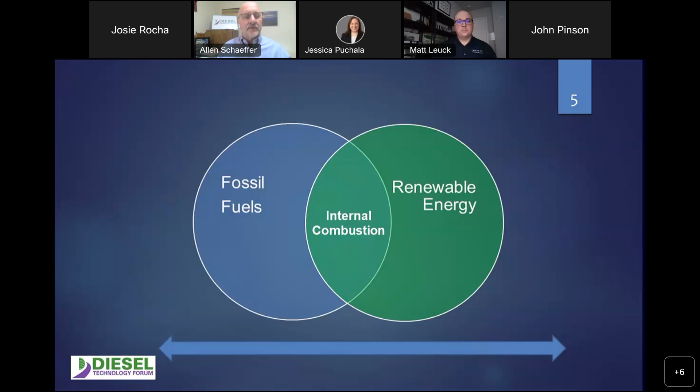I want to begin by framing the moment. We are in a world of transition in terms of energy. We are reliant heavily on fossil fuel energy, but also trying to make a move towards using more renewable energy, both in the kind of energy that powers our homes and powers our vehicles, machines, and equipment. The internal combustion engine is seated squarely in between these two worlds, and that is the subject of our discussion today: the how, why, and where diesel fits—internal combustion engines, including diesel and other types—how they fit in this future going forward.

There are, as you all know, many global policies and pledges in place now that are impacting future fuels and technology. This slide lists a few of the major ones, including the Paris Climate Accord and some more specific commitments made by the US government.

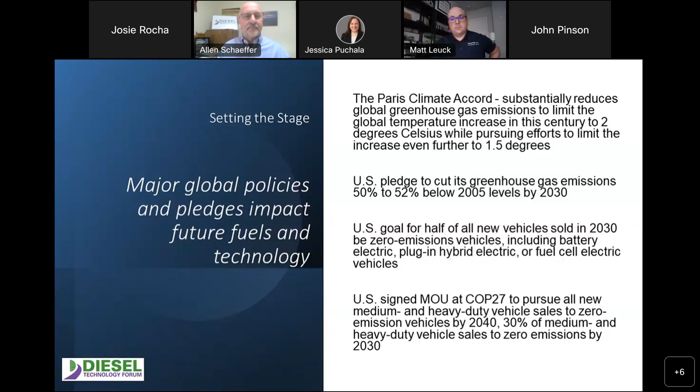These have led to a major emphasis on electrification and technologies that could replace internal combustion engines in some sectors. But there are many uncertainties here for this kind of transition, including geopolitical concerns and others listed here. There are also many questions about whether or not these kinds of transitions can take place in the time frames that have been identified. And then there is a question about whether or not alternatives to internal combustion engines truly are zero emissions technologies.

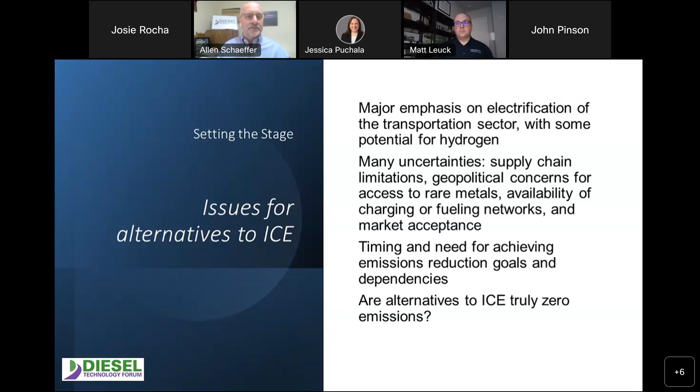And that is the subject for us today. The future for internal combustion engines is one that's going to be determined by a whole range of developments. One of those is that we've seen some government activity proposing or adopting bans on future internal combustion engines used in passenger vehicles and some commercial vehicles in some countries and even in some US states. On the other hand, there is a fairly strong prediction that the global internal combustion engine market is going to grow throughout the rest of this decade with a fairly aggressive growth rate, owing to the nature and importance of the internal combustion engine in powering our global economy today.

So we want to know how, where, and why internal combustion engines and fuels will contribute to helping achieve some of those goals outlined on the initial slide. And that's the focus of our discussion today.

Our session will be broken down into three pieces. We're going to hear a keynote presentation in just a moment. Then we will get into a discussion about the markets, technology, and fuels issues around internal combustion engines. And then we'll finish up with a discussion about policies and address these and other questions related to that.

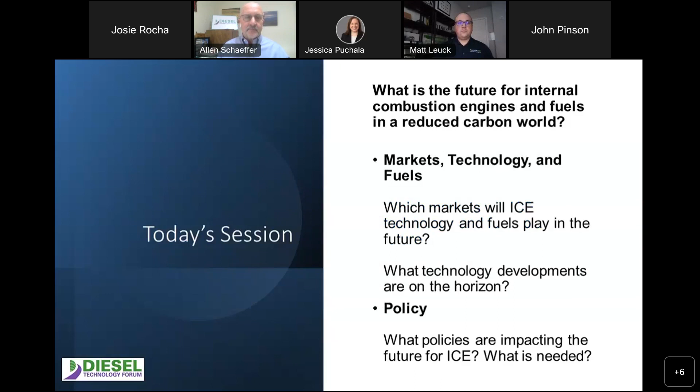I want to thank all of our participants today, and I will be introducing them as they begin their speaking engagements. We have the great benefit of leaders in technology and in consultancies, both on the energy side and the engineering side. I'm really excited to hear the different perspectives you're going to get in the next few minutes. So without further ado, let me introduce our keynote speaker—and for many of you, Dr. Kelly Senecal will need no introduction.

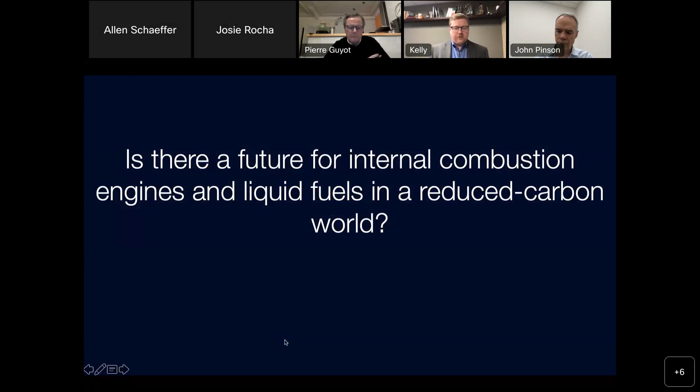So again, asking the question: is there a future for internal combustion engines and liquid fuels in a reduced carbon world? Many people might look at this and say, doesn't look like it. I say yes, very emphatically I say yes, and you'll see why in a moment, and you'll hear why from all of us today in the panel session.

My thoughts on this topic: I believe we're making a big mistake in the transportation sector, including passenger cars, with the singular push - or what appears to be a singular push by many - toward battery electric vehicles, or BEVs for short. If our goal is to reduce transportation carbon emissions as fast as possible, hybrids and also renewably fueled internal combustion engines must make up a significant portion of the fleet, along with BEVs, for years to come. And I feel that instead of pushing a silver bullet kind of solution, government and industry should educate, promote, and incentivize a diverse set of transportation technologies. Because as we'll see today, the best technology depends on location, application, and also budget.

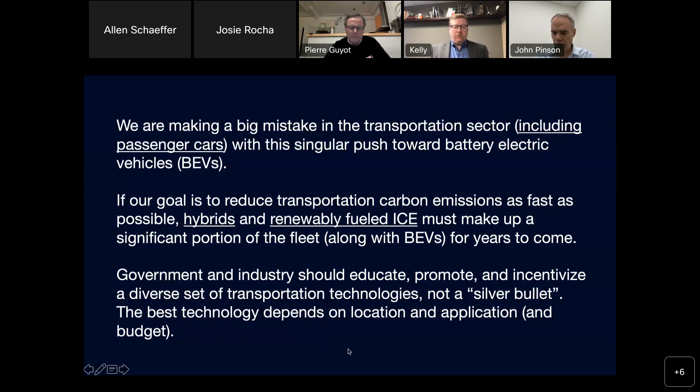My slides here at the beginning will be a little bit passenger car, light duty focused. I did that intentionally because we're going to be hearing a lot about other markets and other applications throughout the panel. Passenger car seems to be the one area where people think that ship has definitely sailed and we're going to be going all electric. So I kind of wanted to make the case that I don't agree with that. So how did we get here? Well, we've already talked about it, right? We have electric vehicle...

This is great technology, vastly improved over the years. The technology itself at a fundamental level is as old as the internal combustion engine, arguably older. But in the last couple decades, maybe a decade or so, we've made a lot of progress. Tesla's made a lot of progress, the other OEMs have made a lot of progress. This is becoming a viable way to get from point A to point B, especially for light duty.

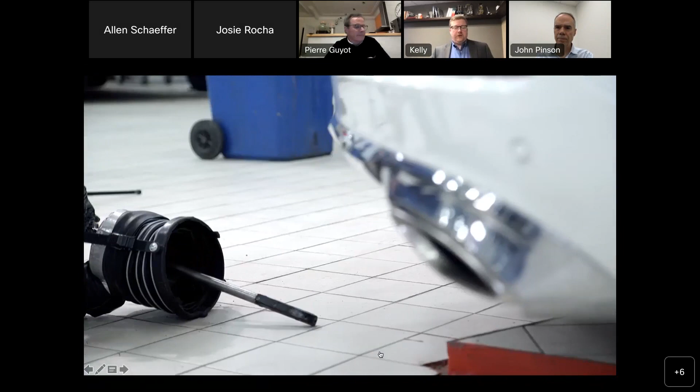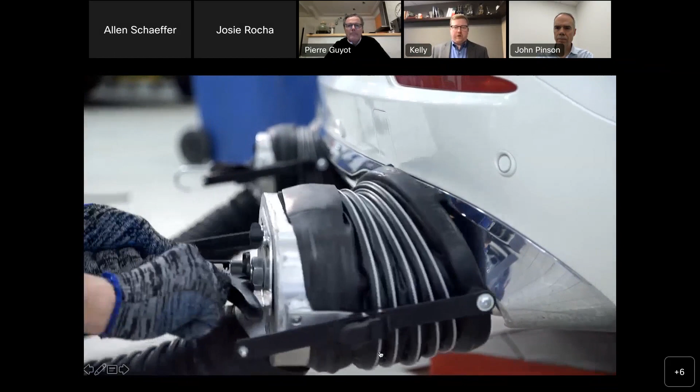The other reason why we're here is, of course, the Dieselgate scandal, which kind of gave the internal combustion engine in general, not just diesels, a bad name. And we're really hyper focused on tailpipe emissions. That makes sense because historically, most transportation vehicles have used internal combustion engines, so the majority of emissions come out of the tailpipe.

So what is the problem now? I would argue we've introduced new vehicle types, BEVs, even fuel cell electric vehicles, without proper methods to account for the environmental impact of driving them. Regulations are typically based on tests measured at the tailpipe, but zero emission vehicles have no tailpipe. What this effectively does is make the CO2 problem someone else's problem.

It's no longer the transportation industry's problem. A zero emission vehicle, in the light duty world at least, is counted as zero CO2, and sometimes it's even counted as more than one zero CO2 vehicle. What that allows people to do is sell these zero emission vehicles and then effectively sell more large, low fuel economy vehicles because of the way we do fleet averaging. So this is kind of a head scratcher.

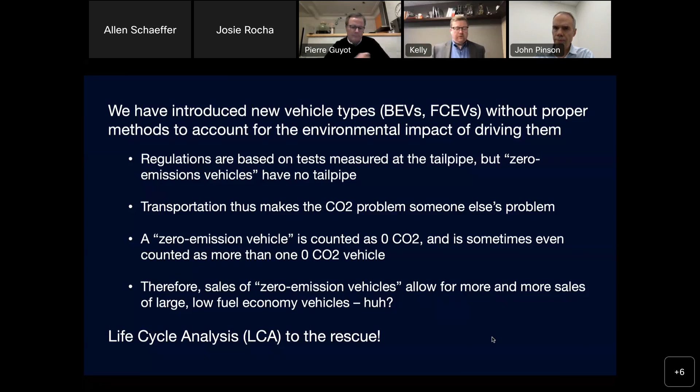Is it really reducing our greenhouse gas emissions at the end of the day? Sometimes yes, sometimes no. But really the way I believe we should be looking at this problem, instead of just looking at the tailpipe alone, is something called life cycle analysis. So what is life cycle analysis? Briefly here.

Typically when we regulate cars, we look at the use phase. Here's a car, imagine it has a tailpipe—what are the emissions coming out of the tailpipe? When you have a vehicle that you need to charge from the grid, we should also be including the electric power generation and distribution, because as we know, when you charge your vehicle, that is creating emissions, just not where you're located.

What about producing the vehicle and the battery? It's very carbon intense to produce these large battery packs. There's also disposal and recycling, and extracting and processing raw materials. So these are all the different phases of life—sometimes called cradle to grave—all the way from extracting the materials needed, the production, using the vehicle, all the way to disposal and recycling. All of these things have an impact on your true driving emissions, and all of these should be considered.

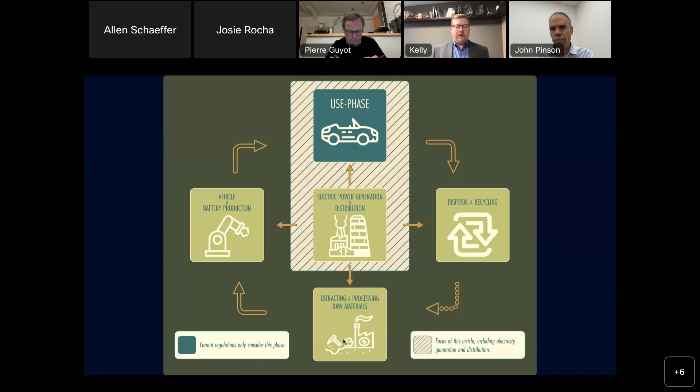So with LCA, it's very promising if done correctly, but it's currently not part of any regulations. It's mainly being used for academic purposes, and also to inform future policy, at least that's the intent. There are a lot of assumptions that go into life cycle analysis, and if you're familiar, you'll know what I'm talking about. A lot of these assumptions are often made to favor battery electric vehicles, whether intentional or not. I think a lot of times it's not intentional.

Often we will compare to traditional internal combustion engine vehicles and not hybrids. We know that adding an electric motor and a battery to an internal combustion engine allows it to be more efficient—that's something we should probably be doing on every vehicle. An average total electricity mix is used to calculate the charging emission rates, and then overly optimistic projections are used for the future electricity mix.

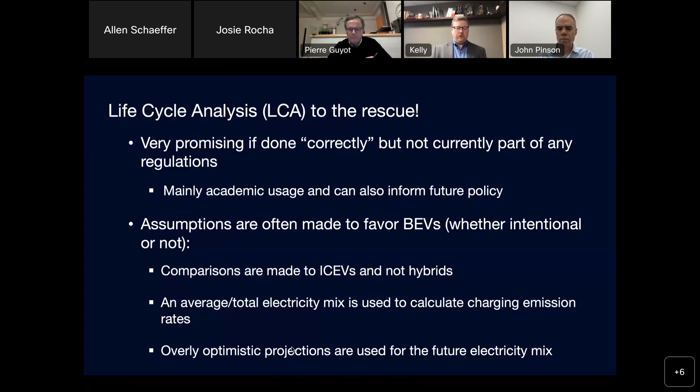Here's an example, a study from the ICCT, which I like to look at because it shows the different issues that are out there for these LCAs. One is they compared an ICEV to a BEV—there is no hybrid. They've looked at hybrids in other studies, but not in this particular one, and we know hybrids would do significantly better than the ICEV. They're also using an average electricity mix for the entire United States, and I'll show how I think that should be done in a moment.

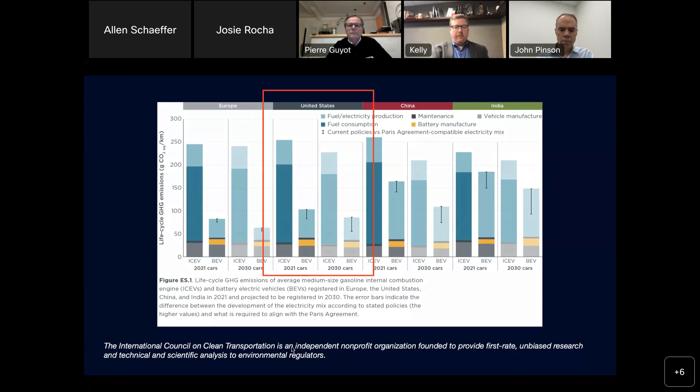And then they are making projections about the future electricity mix, which is true. So how should we compare vehicles using LCA?

I'm not going to go into the details, but I invite you to check out a recent study we put out with one of the SAE journals, called a Data-Driven Greenhouse Gas Emission Rate Analysis for Vehicle Comparisons. This allows us to compare, say, battery electric vehicles versus full hybrid electric vehicles.

If you're not familiar with the lingo, full hybrid means you don't have to charge it from the grid. You're not plugging this in, right? It's just a regular kind of full hybrid. Okay, so how does this look?

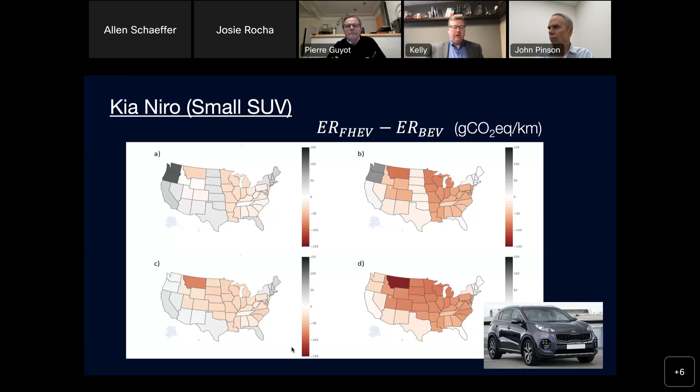But what you see overall, pretty overwhelmingly, is for this vehicle comparison, which is a small SUV, a pretty popular vehicle size in the US, driving the full hybrid actually is better for the climate than driving a battery electric vehicle. Okay, so what are my recommendations?

We'll talk a lot about this throughout the panel session today. But I feel like we should take a balanced approach to transportation, recognizing there is no silver bullet solution. I don't agree with any bans. We shouldn't be banning any particular technology. We should set targets and let the best technology win, understanding that the best technology will likely vary depending on where you are in the world or even where you are in the US.

Use life cycle analysis when comparing technologies. Including only the tailpipe emissions, or even just the use phase where maybe you are including the charging, can still significantly misrepresent a technology's environmental impact.

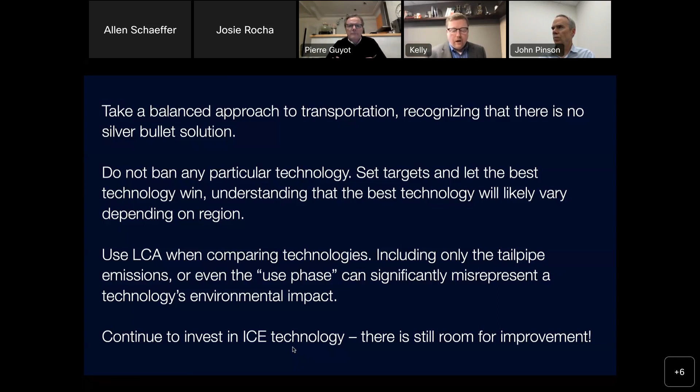I believe we need to continue to invest in internal combustion engine technology. Counter to popular opinion, there is still room for improvement. We should be devoting significant resources to investigating carbon neutral fuels, and you'll hear about this today in the panel.

This allows us not only to make use of the current infrastructure, but what do we do about the existing fleet? Even if we were to turn over all new vehicles to battery electric, there's still a lot of vehicles that are going to be on the road for years and years to come. So we need something to help us decarbonize the existing fleet, and these carbon neutral fuels or low carbon fuels allow us to do that.

Hybrids are actually the fastest way to reduce CO2 emissions from vehicles. We should be treating them that way. I don't have time to go into that table, but I'd be more than happy to answer questions later on that. And then overall, engineering, not politics, should drive future transportation policy.

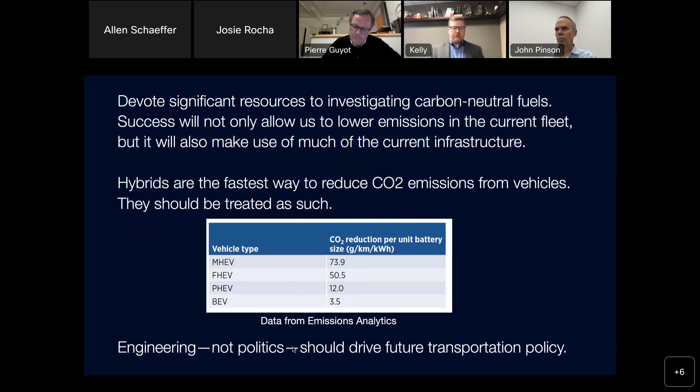So if I'm going to leave you with a couple of items here, one is combustion and decarbonization are not mutually exclusive. We need combustion, we need the internal combustion engine and its fuels. Hopefully we're moving away from fossil fuels as fast as we can, but we need this to help drive decarbonization or defossilization.

And then finally, I'm going to leave you with a question that my son asked a few years ago when he was 13. He had to do a science report, and people think I had a major influence over this, but he would not let me look at this at all. I just happened to snap a photo when he left it on the kitchen counter. His question that he was going to answer in his report is, what is the most climate friendly today, a car with an electric motor or a car with an IC engine? And I think his answer is very appropriate.

It depends. I think we all need to keep that in mind. With that, I'd like to conclude.

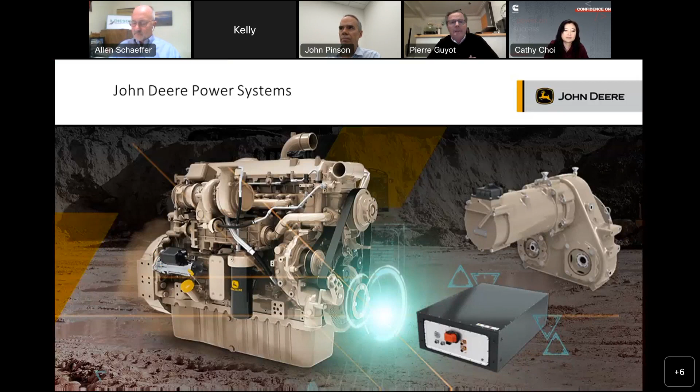So next slide. John Deere Power Systems is a part of John Deere. We are vertically integrated for engine, drivetrain, and battery. We produce 100,000 engines around the world. We produce engines from 2.9 to 18 liters in South America, North America, Europe, and India. Next slide.

And John Deere, as you see, is present globally in every part of the world. We have more than 100 locations. We are from the heart of farming in Illinois, with more than 75,000 employees, a 52 billion dollar company.

One statement I want to open with is we are fully committed to sustainability. John Deere is 185 years old, so we know what sustainability means, we know what resilience means. And we are very committed to helping the world flourish, specifically the people around farming and construction, by committing to reducing our CO2 emissions by 30% by 2030. It's a big challenge for us, but I think both our equipment and our customers can play a significant role in helping the world move into a low carbon environment.

So looking forward to our conversation. I think it's an exciting time we are in, and when an industry is transforming, if people like a large multinational, we have a big role to play to enable that.

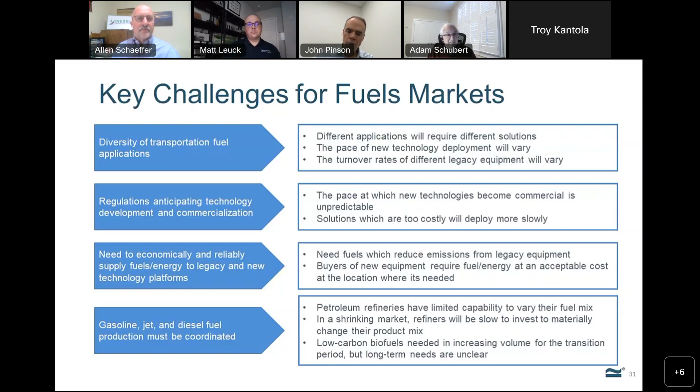Yeah, I'm not hearing you, Allen.

Sorry, thank you, Adam. And I see we have a very healthy Q&A going on in the chat right now. I just want to encourage you to submit your questions for the group, and we'll get to some of those as we move ahead.

Our first topic for discussion is the markets for internal combustion engines and fuels. We've asked our panelists today to consider these and other aspects of that question group. What about the future markets? What are today's markets? What's going to drive folks toward or away from internal combustion engines?

To kick us off with that, I'd like to ask our two OEMs, first Cummins and then Deere, to share some insights about what they see as places where these technologies for internal combustion engines will continue to play a role and where others might come in. So Cathy, let me ask you to kick us off with our first discussion segment.

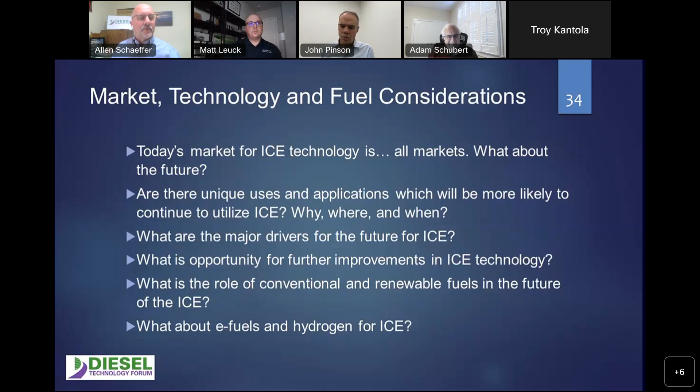Absolutely, thank you. One of the challenges we have is that the markets we serve and the applications in those markets are extremely diverse, and that makes it quite challenging to achieve zero emissions. That challenge is great, but from an engineering and technology standpoint, it's exciting as well. This is a great time to be a technologist.

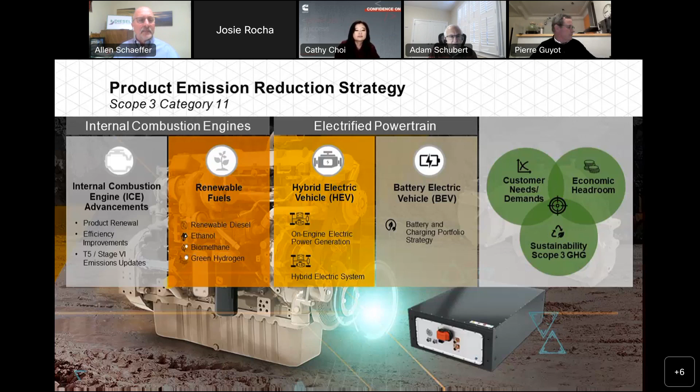I'd like to shift a bit towards some of the technologies coming online to help achieve further reduction in carbon emissions, both on the internal combustion side and others. Troy, I know Tenneco is a leader in many of these segments. Maybe share with us what kind of technologies you're working on that might help extend the future of the internal combustion engine, making it more efficient and lower in emissions.

Yeah, I can speak to that. Tenneco has literally hundreds of products and tens of thousands of research hours dedicated to reducing CO2 through efficiencies and lowering friction. On the advanced end, we have research ongoing with bipolar plates, coatings, types of steels and forms — technologies we're really comfortable with. We also have piston coatings that help insulate the combustion chamber to keep energy in the working fluid, resulting in useful torque to the engine.

We also have passive pre-chamber work that will distribute, normalize, and stabilize combustion processes, along with a host of products that reduce friction, whether it be seals, coatings in the ring pack, or coatings on bearings. Within our clean air group, we also have a technology that helps control criteria emissions in a low CO2 mode, using efficient combustion to warm up the catalysts so NOx and other emissions can be reduced.

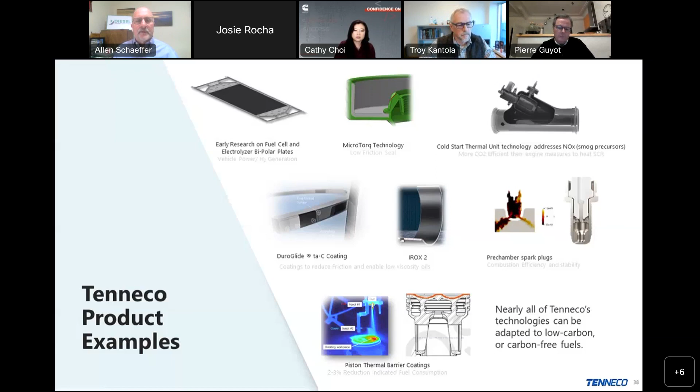I want to pivot now to the fuel sector a bit, and we have the benefit of Neste and Matt's expertise here. You guys are plowing some important ground and have been for a number of years in California. Maybe just give folks a quick snapshot of what renewable diesel looks like and how it helps with the internal combustion engine.

Sure. So we're one of the many levers you can pull to get further down this road, in addition to all the other stuff the OEMs are talking about. Basically, renewable diesel is a drop-in replacement for fossil diesel because it is a hydrocarbon. It can be used at a 100% blend rate — there's no limits with 5, 20, 50, anything like that. It's whatever blend you want, and you can move back and forth at will.

One of the best things, and some OEMs are on the call here, is it's OEM approved because it meets the D975 standard in the US. It meets the EN 15940 paraffinic standard, and it can be used at 100% rate. There really are no issues running it in these new diesel engines.

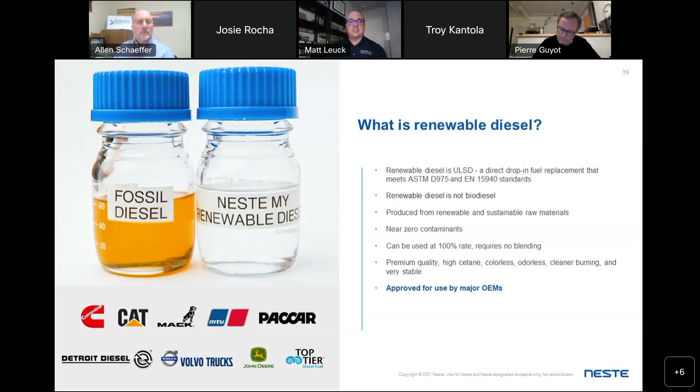But the biggest thing here is the carbon that comes out of the tailpipe when you use a renewable fuel like this. It's what we call biogenic carbon. It was already above ground, captured in plants and animals and things. It's not coming from underground sequestered carbon that's adding to the atmospheric load. We're not building up that atmospheric CO2 load.

So at the end of the day, depending on the feedstock we use, we're getting up to 75% reduction using our renewable diesel fuel by taking what was basically a waste, a trash product, and giving it a new life.

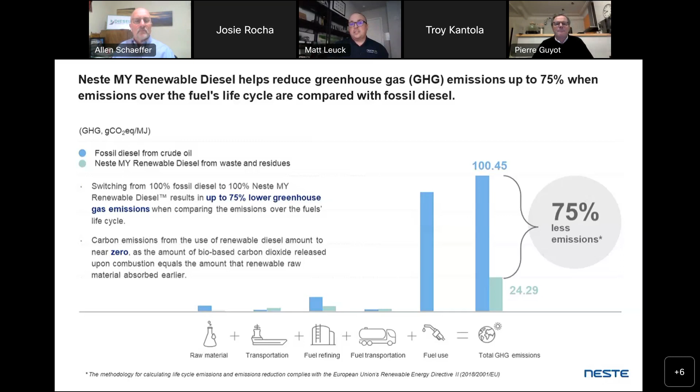Go one more slide. The really cool thing, I don't know how many fleet owners and operators we have on the call today, but there's nothing you have to do to change to it, because it is fully fungible with the fossil diesel already being run. You're going to use the same fueling infrastructure, the same transport trucks, the same engines, the same tanks. It literally is diesel fuel from a different source.

So we say you can do it tomorrow. We literally mean tomorrow. You could call any supplier of this fuel and start filling it in your tank without even draining what's there before, and start realizing immediate benefits in this regard.

You're muted again, Allen. Yeah.

Matt, is it true that renewable diesel can be used in any diesel vehicle or engine? Yeah, I mean, it's a hydrocarbon, right? It meets the same ASTM diesel spec that every other gallon sold in the United States meets. So new and old technology can all use it.

So that's definitely emerging as one of the hot topics that's going to increase the sustainability, at least of the diesel engine, as we go forward. Just any final comments that folks want to make in this space here? I think some really good starter points, but other comments anyone wants to make?

So just a few points, Allen. When we think of internal combustion engines, clearly most of our focus today is on the diesel platform, but we also think about gasoline, we also think about natural gas. So just to give a quick review of where we're going in those spaces.

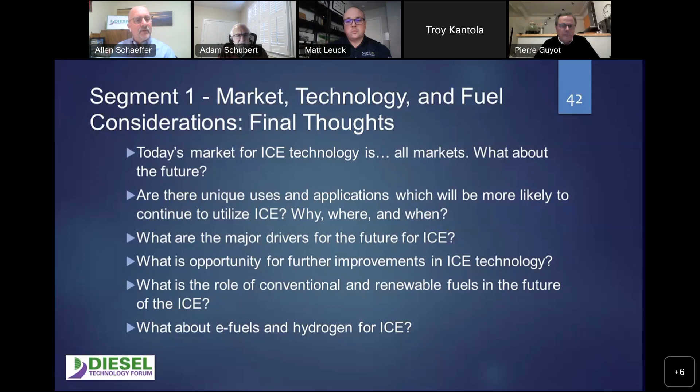But one of the issues that always comes up in these discussions are policies, and we've touched on some of these already. But what is being put in place today, what is helpful and what is not helpful in terms of achieving these goals?

I think it definitely, you all are demonstrating clearly that this is not a one-size-fits-all solution to this complex problem of climate. But I wonder if our policies are keeping track of that. So I want to kick off with at least one question for Troy. I know you all have some thinking about this, about how things have changed, maybe share that with us as a perspective to start.

Sure. Could I just punctuate the former discussion with, there's been some text in the chat about infrastructure before I talk about this policy. I just want to make a point that the three major motivating technologies out there, liquid fuel, fuel cells, and batteries, they all have their own weakness when it comes to infrastructure, whether it's getting the feedstocks, equipping the nation to plug in their cars, or where we're going to get our hydrogen from. There's not one of those technologies that can be favored. They're all equally difficult. We'll leave that now.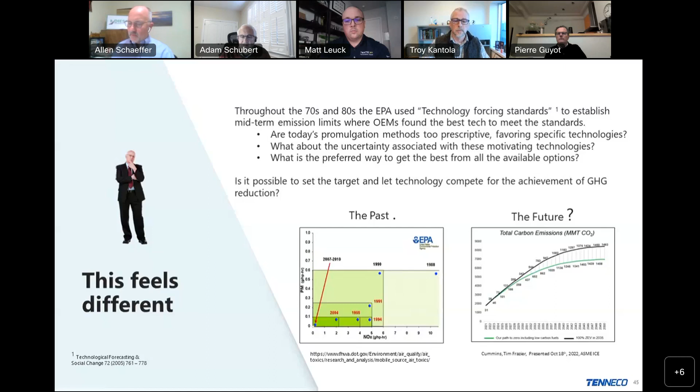So when it comes to CO2 reduction, I think a more even-handed approach would be better. I think this idea dovetails with Kelly's discussion on life cycle analysis. I think that hand in hand, technology-forcing standards and life cycle analysis would be a wonderful approach to the problem. Next page, please.

So when we talk about this, and I don't want to replow the ground that Kelly's already covered, but to be fair, there's a lot of uncertainty, and I mentioned this a bit about infrastructure. There's a lot of uncertainty with internal combustion engines, with electric vehicles, and even with fuel cells, and how we address the carbon loading that we're putting into the atmosphere. So we can't really say one is better than the other, quite frankly.

So can we wait for these preferred technologies that we see in the Inflation Reduction Act to mature and grow and come to a point where they're really effective? Or would it be better to just open up the gates and let all these technologies compete on an even scale, and use a measuring stick like life cycle analysis to do that?

Next step, please. I'm not going to read all this. This actually comes from an excellent article that was published in the January issue of Automotive Powertrain Technology International. Really nice write-up on all the different problems, the idiosyncrasies that come along with life cycle analysis. It's well done. So in this publication, there were a couple of points that I wanted to make.

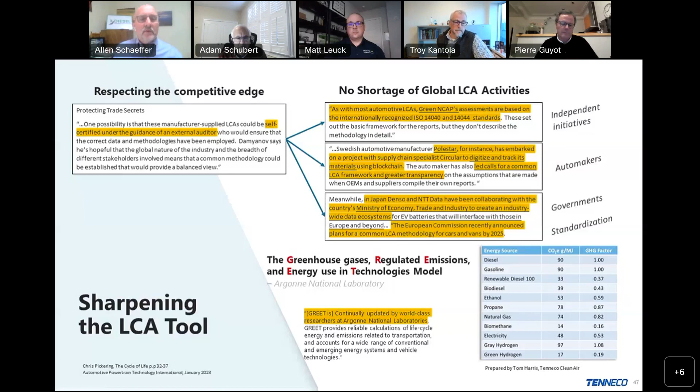Some excellent insights there, Troy. Thank you. John Pinson, I wanted to come back to you. I know you've been at this a long time, and your career has been right there at some of the major inflection points of emissions and regulatory policy. What is your take about what's worked best, and what do we need for policy going forward for the internal combustion engine?

I would first of all wholeheartedly agree with the comments of Troy. We are certainly in an era of very rapid innovation and change in powertrain technology. It's very exciting. There are some very promising things happening in fuels and even in electrification itself. And there's a great temptation, when there are a lot of early signs of progress, to pick a horse, pick a technology.

But if we look back at history on successful and unsuccessful regulatory efforts, those that have been far more successful than those regulate well-considered targets that are based on outcomes which are important to us. And carbon is our enemy of the day, and I think carbon-based regulatory measures, which are well-considered, would do much more to drive innovation.

And then let's let the market innovate. And certainly, as the speakers have already stated well, there are a lot of different use cases out there which are not going to electrify quickly, and possibly you could make the case that in some cases it's never going to be practical. So I think that a regulatory policy which drives us towards a lower carbon future would be a lot more successful, because then each use case could then innovate for what is most cost effective, what is most useful to the end use, and what is acceptable to the customer.

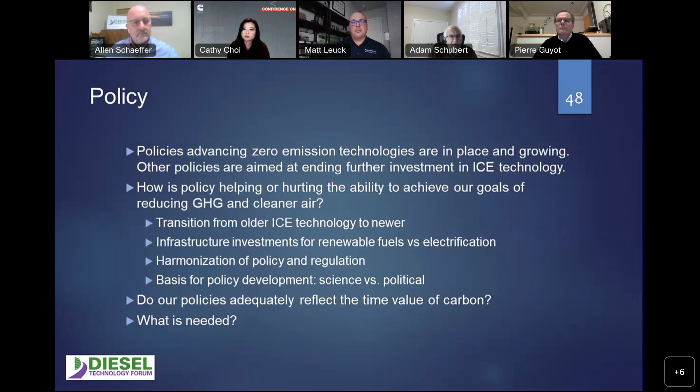I just want to jump in and echo what Cathy was saying. The technology-agnostic portion—I know Kelly says that a lot too—it's not just on the hardware side, it's also on the fuel side. If the goal is net zero, there are renewable natural gases and things still used in internal combustion that are negative carbon intensity. With regenerative agriculture and other technologies, you can get near zero with future liquid renewable diesels and things. So if the goal is just zero carbon, like Cathy was saying, we really need all the options available rather than putting everyone down one path, down one funnel, and hoping for the best.

And if I could just jump in, you really need to tie that back to the regulations again, because if we simply look at the tailpipe as our way to measure emissions, then we're going to lose the advantages of things like renewable natural gas, potentially renewable diesel. So we have to look at this life cycle analysis approach, if you want to call it that.

I will say life cycle analysis, though, is also not the silver bullet, in the sense that it's a very hard problem—very hard to get right. But I think there needs to be a lot more focus on getting it right, a lot more research funding on coming up with these standards, because I think it's critical. So really all of this comes back down to: we need a diverse portfolio of solutions, and in order to get there, we need technology-neutral regulations.

I'd just like to say that on top of that, we need technology neutral incentives as well. Yeah, absolutely. They're just two sides of the same problem.

To speak more to what Cathy said, as a component supplier, a change in fuel for us in an internal combustion engine represents the same theme, just a slightly different tune. We have over 7 different fuels we're running right now, learning the idiosyncrasies of each. When it gets down to the combustion process, take hydrogen for example. On an Otto cycle, not a diesel cycle, the flame speed becomes your friend, because that constant volume pressure rise means pure efficiency. So managing that becomes a challenge.

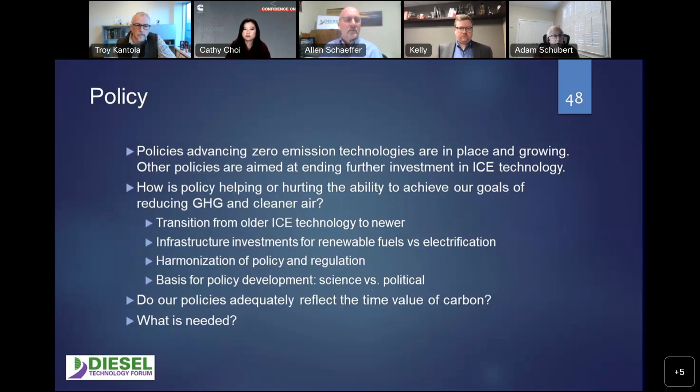I like to think about this as the time value of your carbon reduction. Just like with money, $1 today is often worth more in terms of overall environmental impact than $2 sometime in the indefinite future. The carbon reducing power of making rapid incremental progress through fuels and engine innovation will bring us tremendous benefits, and we should do that while also working on the others.

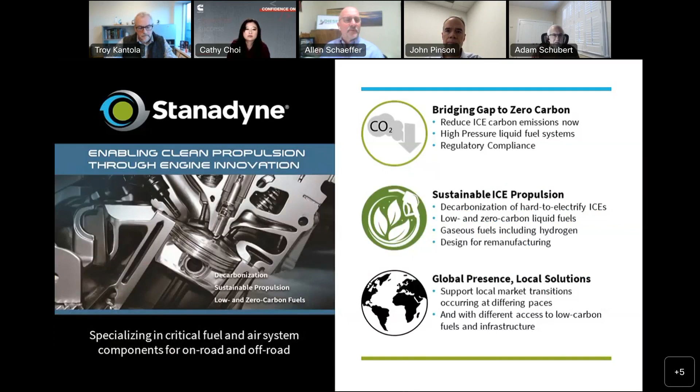Matt, I wanted to call on you. We had talked about this before, but we're looking at these different solutions. There's a gap that's here, and what can help fill that?

Anyone else? If I could add a little bit to that, Allen, maybe tie it up with a bow here. The decarbonization journey is as important, or maybe more important, than the destination. It's okay to have a perfect solution out there that we're heading toward by 2050, a renewable grid, all electric vehicles. But we need to be doing everything we can today, as everybody has said, to get there as fast as possible. So the journey is as important as the destination, maybe more important, because of the time value of the CO2 reduction, as John said.

One thing I think we should really consider is that ICE is part of the solution, not only the problem, and it can play a significant role in helping. The journey and destination is a good analogy, but you can also have a more mathematical analogy between the line and the surface. We need to address the surface, meaning the fleet and everything going forward. We have millions of vehicles on the ground, and these can be upgraded or transformed with fuel, while continuing to work on a mix of solutions to address the lack of feedstock down the road, and leveraging innovation in electrification, hydrogen, and e-fuel with different time horizons. But given the urgency on global warming, we need to take every option to decarbonize and not dictate things through a narrow mindset.